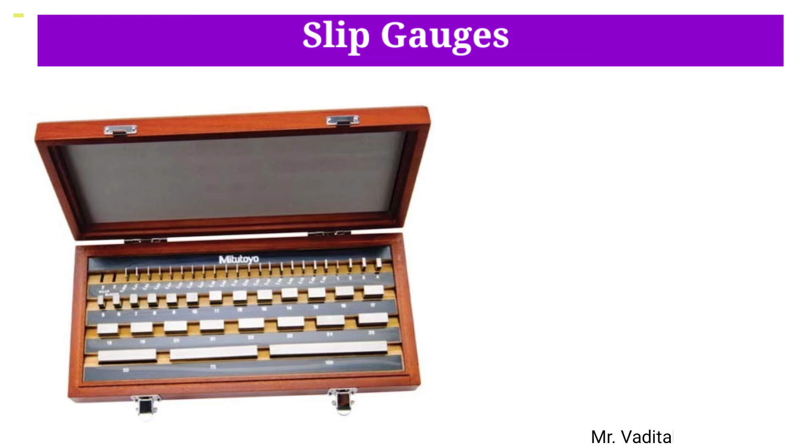Slip gauges or gauge blocks are universally accepted end standards of length in industry. These were introduced by Johnson, a Swedish engineer, and are also called Johnson gauges.

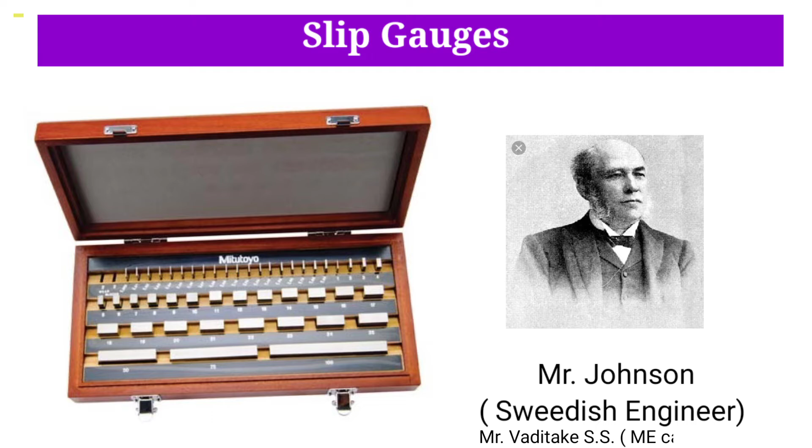According to IS 2984, framed in 1966, the size of a slip gauge is defined as the distance between two plane measuring faces, one being constituted by the surface of an auxiliary body with which one of the slip gauge faces has rung, and the other by the exposed face of the slip gauge.

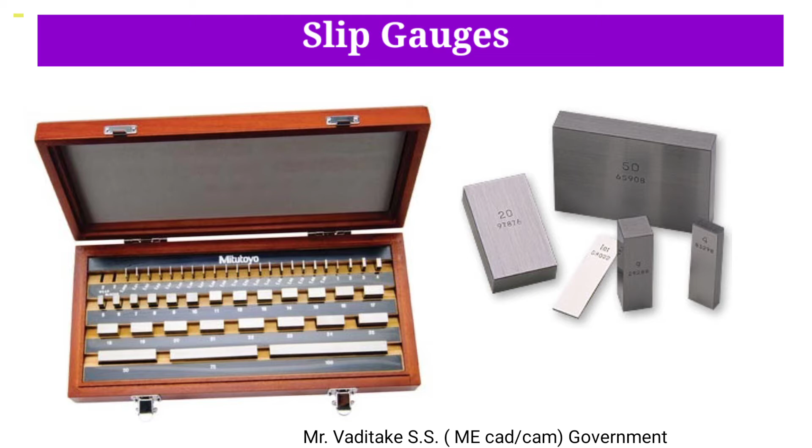Generally, slip gauges are made from high grade steel with a coefficient of thermal expansion of 11.5 plus or minus 1.5 into 10 raised to minus 6 per degree Celsius, between 10 to 30 degrees Celsius.

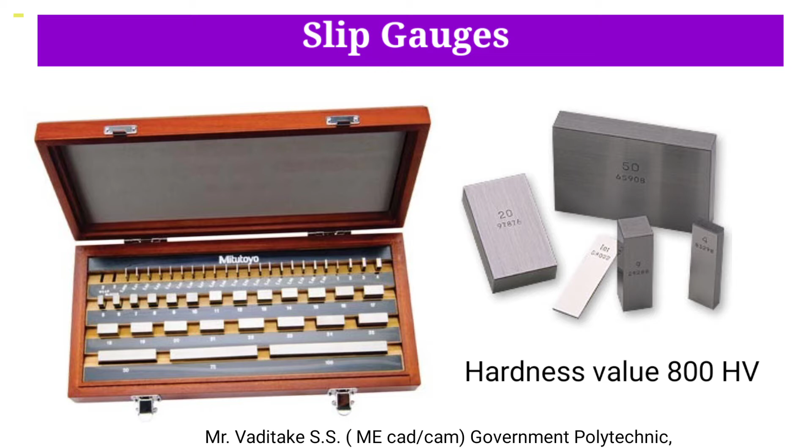The slip gauges are hardened more than 800 HV hardness value to make them wear resistant. They are rectangular blocks of high grade steel with exceptionally close tolerances. For successful use of slip gauges, their working faces are made truly flat and parallel.

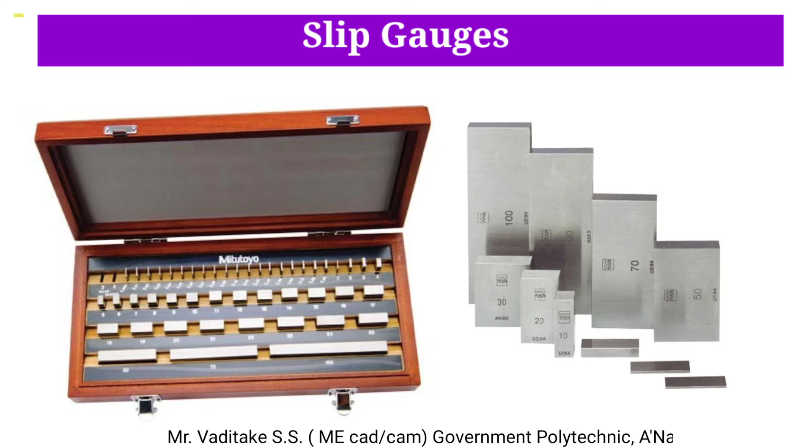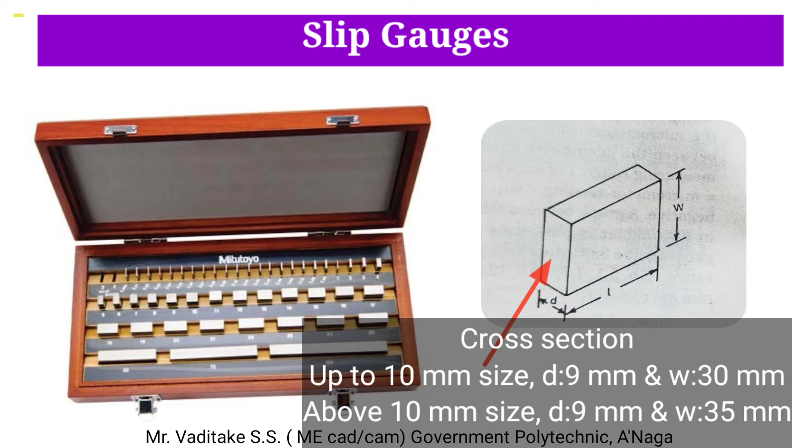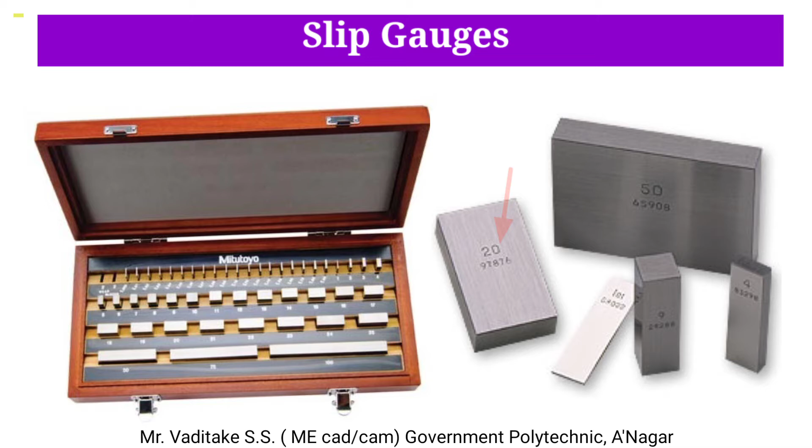The cross sections of these gauges are 9 mm by 30 mm for sizes up to 10 mm and 9 by 35 mm for larger sizes. Any two slips, when perfectly clean, may be rung together. The dimensions are permanently marked on one of the measuring faces of the gauge blocks.

The success of precision measurements using slip gauges depends on the phenomenon of ringing. The slip gauges are rung together by hand through a combined sliding and twisting motion.

Procedure of ringing: before using, the slip gauges are cleaned using a lint-free cloth, chamois leather, or a cleansing tissue. One slip gauge is then oscillated slightly over the other gauge with light pressure.

One gauge is then placed at 90 degrees to the other using light pressure, and then it is rotated until the blocks are brought in one line.

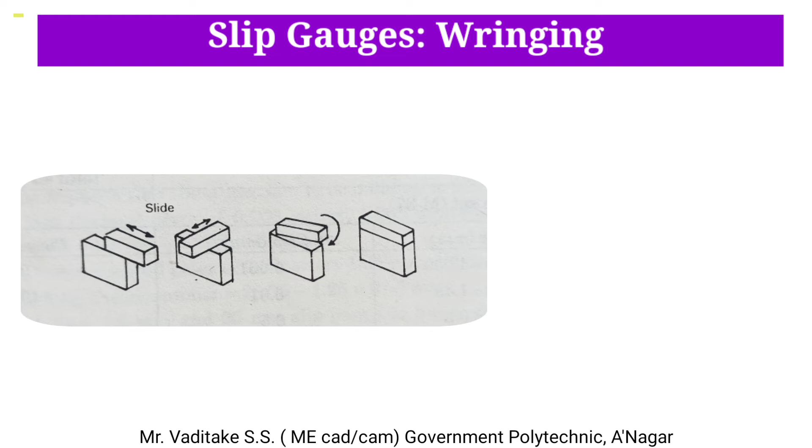In this way, air is expelled out from between the gauge faces, causing the gauge blocks to adhere. The adhesion is caused partly by molecular attraction and partly by atmospheric pressure.

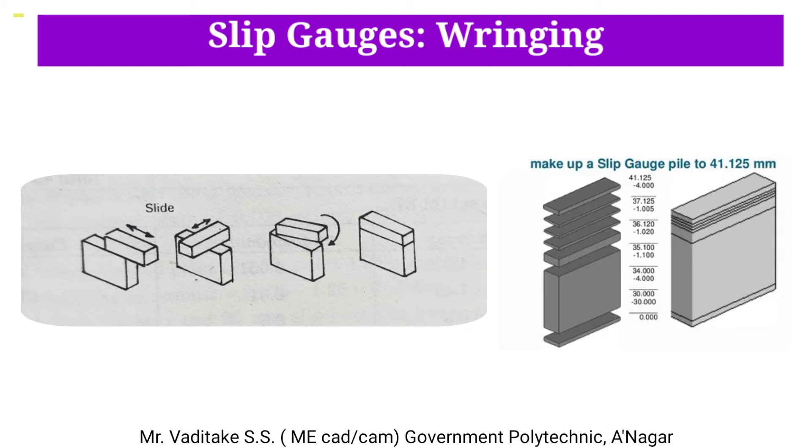When two gauges are rung in this manner, the resulting length is exactly the sum of their individual dimensions. The rung gauge can be handled as a unit without the need for clamping the pieces together.

Indian standards recommend 5 grades of accuracy.

Grade 2: these gauge blocks are workshop grade for rough checks. These are used for preliminary setting up of components where production tolerances are relatively wide, for positioning milling cutters, and checking mechanical width.

Grade 1: gauge blocks are used for more precise work such as setting of sine bars, checking gap gauges, and setting dial test indicators to zero.

Grade 0: these are inspection grade gauge blocks used in the tool room and inspection department for high accuracy work.

Grade 00: these gauges are placed in the standard room and used for the highest precision work, such as checking grade 1 and grade 2 slip gauges.

Calibration grade: this is a special grade with the actual size of the slips calibrated on a special chart supplied with the set.

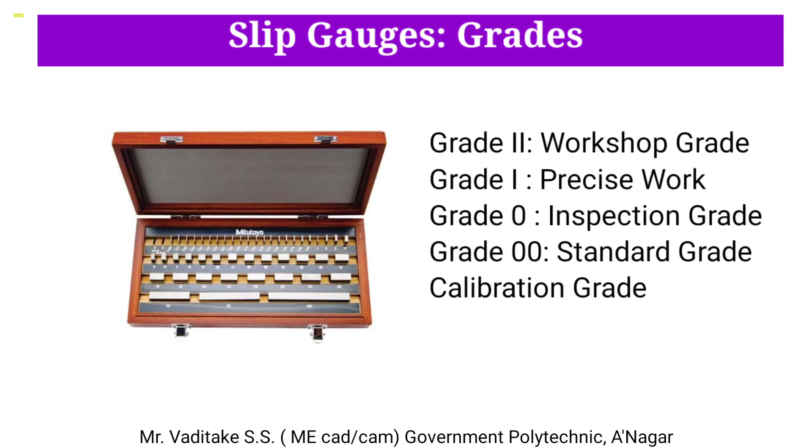Slip gauges are used for direct precise measurement where the accuracy of the workpiece demands it, for checking the accuracy of a vernier caliper, micrometer, and such other measuring instruments, for setting up a comparator to a specific dimension, for measuring the angle of a workpiece, and also for angular setting in conjunction with a sine bar.

The distance of plugs, spigots, etc. on a fixture are often best measured with slip gauges or end bars for large dimensions, and to check the gap between parallel locations, such as in a gap gauge or between two mating parts.

There are many measurements which can be made with slip gauges, either alone or in conjunction with other simple apparatus such as straight edges, rollers, balls, sine bars, and etc.

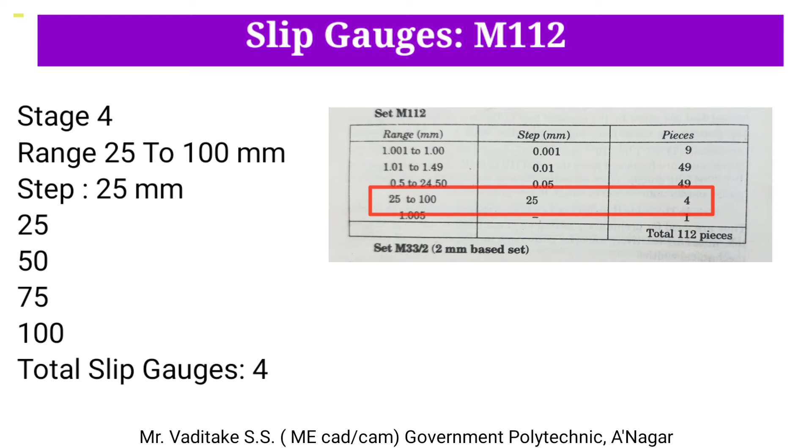The selection of slip gauges for required dimensions: always start with the last decimal place and deduct this from the required dimension. Select the next smallest figure in the same way. Find the remainder and continue this until the required dimension is completed. The minimum number of slip gauges necessary to build up the given dimension should be selected.

Let us suppose that the dimension to be built up is 29.758 millimeter. For the last decimal place of 0.008, select the 1.008 slip gauge.

Now the dimension left is 28.75. For the second decimal place of 0.05, select the 1.25 millimeter slip gauge.

Therefore, the remainder is 27.5 millimeter. Now select the 7.5 millimeter gauge and deduct it from 27.5. The remainder is 20 millimeter.

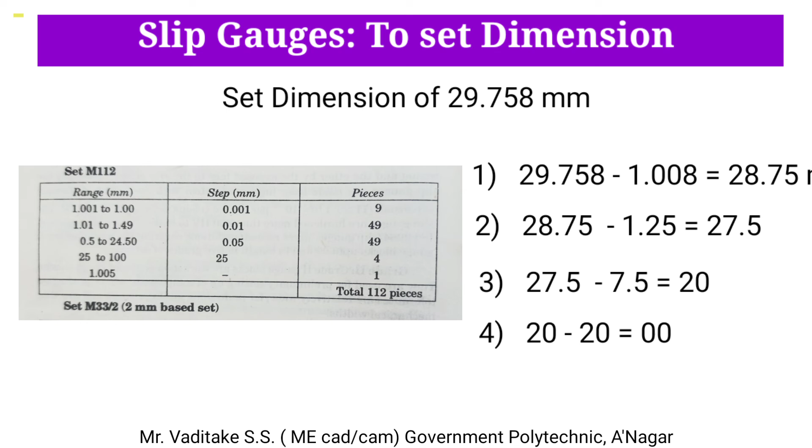And lastly, select the 20 millimeter slip gauge to build up the required combination. Thus, a total of 4 slip gauges are required to set up the given dimension: 1.008, then 1.25 millimeter, then 7.5, and last is 20 millimeter.

Set a dimension of 57.895 by using an M112 slip gauge set.

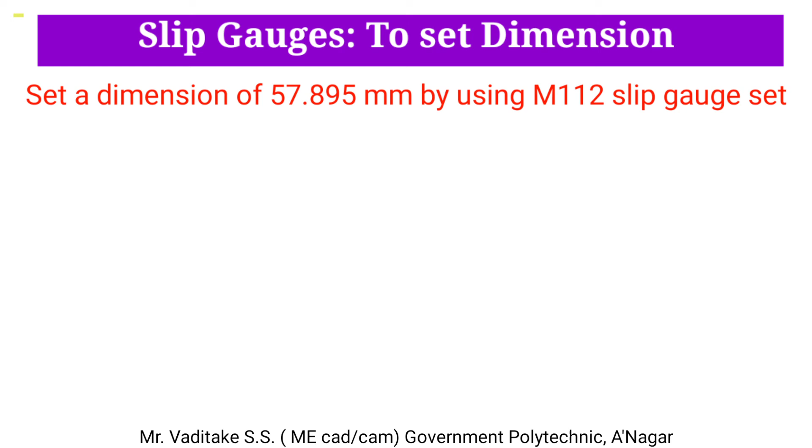As per the procedure, consider the last digit of the given dimension. So the last digit is 5. So from the given set, from stage 1, select the slip gauge of 1.005 millimeter length.

Subtract it from 57.895. It gives the remainder as 56.89.

Then from the second stage, select the gauge of thickness 1.39. After subtraction, the remainder is 55.5.

Now the last digit is 0.5, so from the next stage, select the slip gauge of thickness 5.5.

After subtraction, the remainder is 50. Now select the last slip gauge having a thickness of 50.

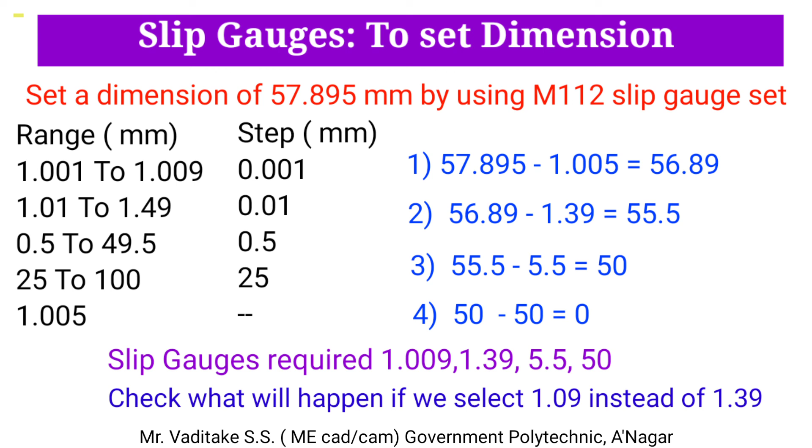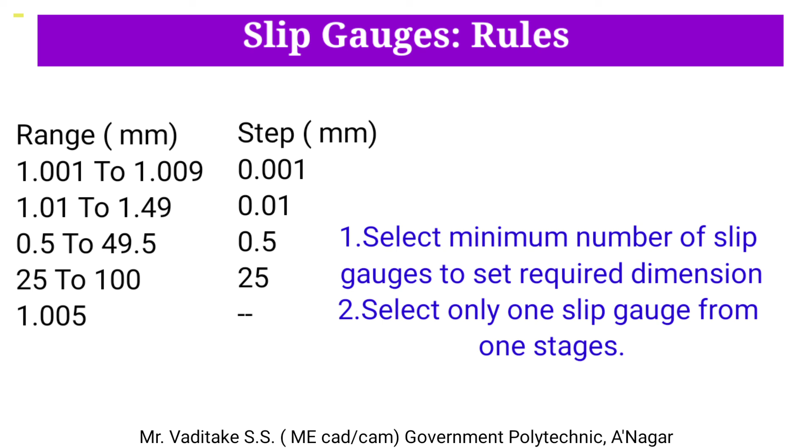Protect all the surfaces against climatic conditions by applying a suitable anti-corrosive such as petroleum jelly. Protect the gauges and their case from dust and dirt. Gauges should not be magnetized, otherwise they will attract metallic dust.

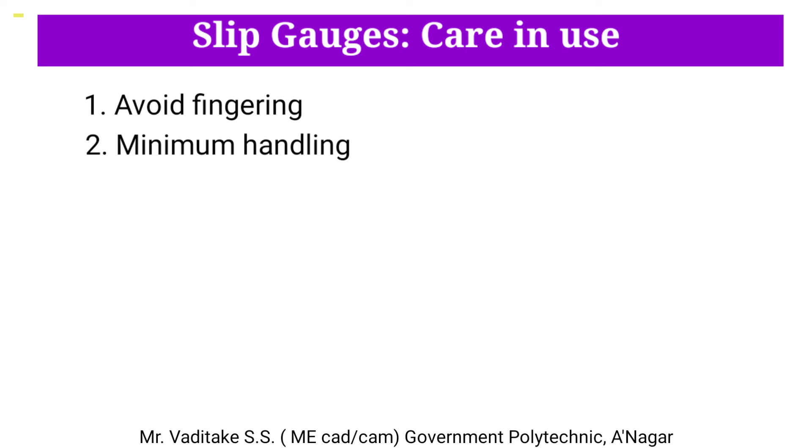During actual use, fingering of the lapped faces should be avoided. Handling should be minimized to avoid transfer of heat from hand to gauges. If the gauges have been handled for some time, they should be allowed to settle down to the prevailing room temperature.

For highest accuracy, measurement at a temperature of 20 degrees Celsius is necessary. Both the work to be tested and the gauges rung together should be allowed to settle down to the prevailing temperature of the room before doing any test.

Gauges should not be held above the open case when being rung together. The required gauges should be selected and the case then closed. Placing gauges with their working surfaces on a surface plate should be avoided.

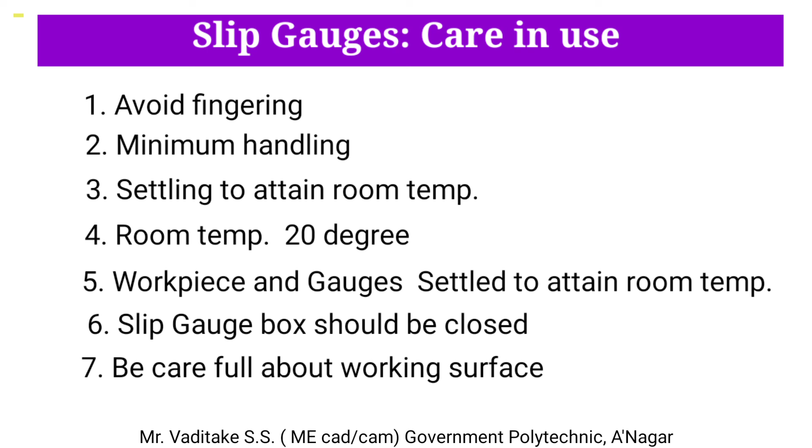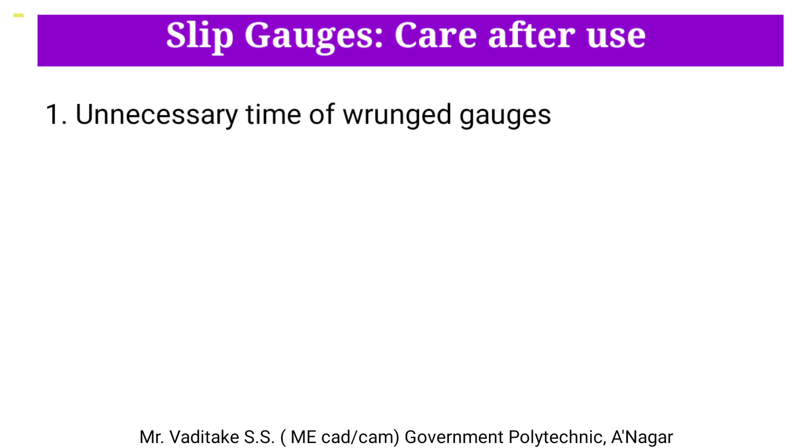Gauges should not be left rung together for an unnecessary length of time. Immediately after use, the gauges should be slid apart, cleaned, and the measuring faces coated with a suitable protective layer of jelly, grease, or etc.

A brush should not be used, as this may aerate the jelly and introduce moisture, and the air bubbles so formed may cause rusting of the faces.